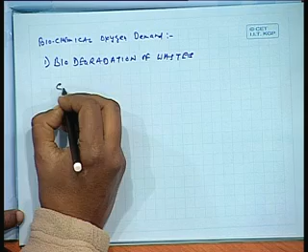Okay. A waste is mostly what you would find as CaHbOcNd, with phosphorus and chlorine. This is a typical waste. This can be any waste or any organic compound, but it is not necessarily a biochemical waste; it is the typical waste.

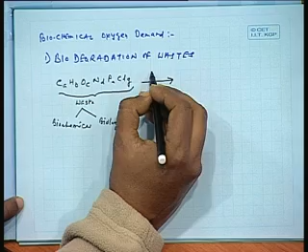A part of this waste can be of biochemical origin, another of biological origin, right, biochemical and biological origin. So this is what the waste would generally be made of. When it is converted by biodegradation, it can be in the presence of microorganisms and oxygen,

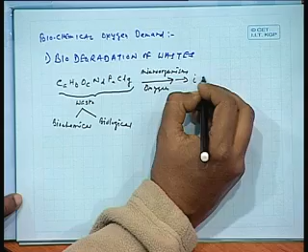it would form CO2, H2O, NH4. Remember this is NH4; nitrogen in water would mostly be available as an ammoniacal radical, plus PO4 3-, plus SO4 2-, plus Cl-. So these would mostly be the reactions that we generally observe in cases like this.

Here, this is the decomposition taking place in the presence of the microorganisms. Now, the thing to understand is why these microorganisms do it. In nature, nothing happens without a cause. Nothing takes place as an accident, or just as it is, without a cause.

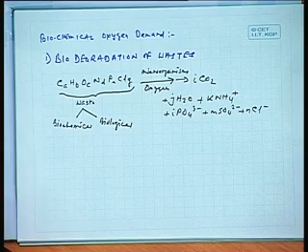Everything has a cause. The microorganisms need them because of two things. First of all, this waste would possibly be in the form of solids, or in the form of liquids dispersed in water. Just like urination is a biochemical waste which is a liquid dispersed in water, or it can be solid waste.

So if it is a solid waste, microorganisms would have to break it down so that it becomes soluble in water, or, even if not soluble, stays in an immiscible liquid state. Immiscible does not mix with water but remains liquid. These two things are very important, because only then can a single microorganismic cell draw it as food by an osmotic method.

Osmosis takes place when there is a change in potential from outside, from positive to negative potential, since there will be a potential difference, so the substance from the external environment would enter the cell.

This is where the microorganisms need to break them down. This remains as the most important reaction, one that can be exemplified as the possible cause for the total human life, total organism life, or total population that we see, basically because this has resulted in wastes getting decomposed. Otherwise, if the microorganisms should not have been there, the waste should not have decomposed at all.

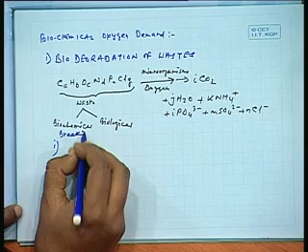This is where the microorganisms play a very important role, and that is how it gets decomposed in two ways. The first process would be known as breaking down into inorganic molecules. We call it mineralization, and the second one we would call biotransformation.

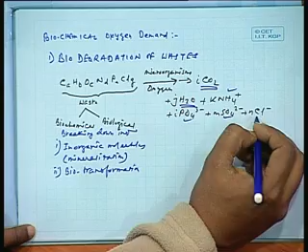Biotransformation: this one is inorganic molecules, mineralization, whereas this one is biotransformation in the form of ions, mostly forming in certain extent in biological materials. So this should be mostly not in the molecular form, it would be in a radical form like this, which would be mostly read like this. So here you can see this would be mostly the biotransformation.

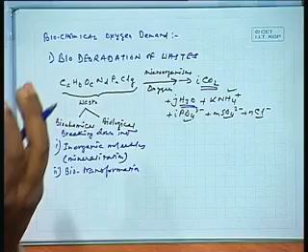So two processes essentially take place, and this happens only because the microorganisms are active, leading these reactions as agents, and they are taking place in the presence of oxygen. So this is one reason why oxygen gets depleted in most of the water body itself.

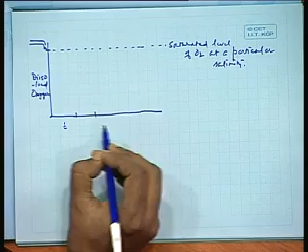What would happen is that this saturated level of oxygen, this dissolved oxygen, if you say it in time, in days - 1 day, 2 days, 3 days, 4 days, 5 days, 6, 7 - it can carry on.

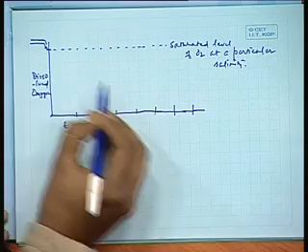So if we just observe this curve now, depending on the nature of the waste, the depletion of oxygen in the water would take place. The rate of depletion of oxygen would depend on the nature of the waste. Remember this, nature of the waste. So you can observe a plot like this.

You can see somewhere it is not going like this, say this is - if you just observe, some of the substances here, mostly you can find this is mostly carbohydrates forming this kind of plot. This is just notional; special kinds of carbohydrates may follow a certainly different curve. This is just for comparison.

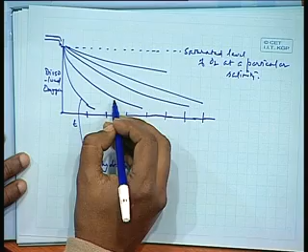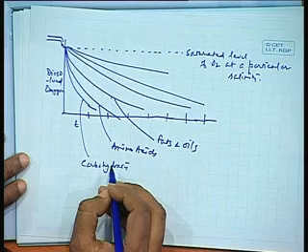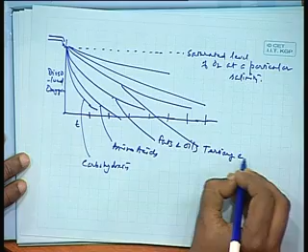Say here, if you look closely, this is amino acids. This one would be fats and oils. So this is tertiary and quaternary - tertiary and quaternary, tertiary carbon and nitrogen compounds.

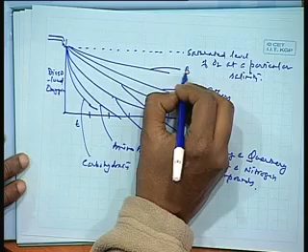Okay, similarly you can see this would be ethers, this might be mostly benzenes. So this is what, generally you will not find in any textbook, but this is what would be mostly the nature of the plots. This is what would be mostly the plot. So this figure is to suggest

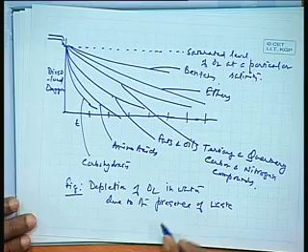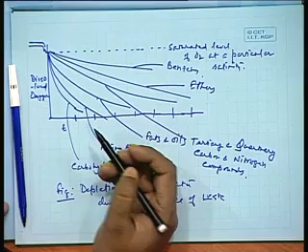that is depletion of oxygen in water due to the presence of waste. We can see this if we just try to observe this now. Here, interestingly, when we are talking about most of this biochemical waste, this would mostly be around this region. This is mostly the biochemical region. These are all the other biological wastes, which should be here. And so mostly you can see this biochemical waste, this would be primary level carbohydrates.

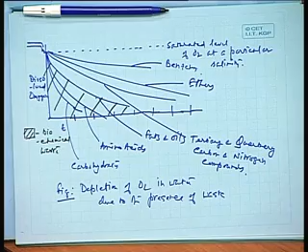Mostly this would be the formation, this one would be showing the biochemical waste. So this is about the biochemical waste, this is about the biological wastes. Biological and biochemical waste, you can see the relationship.

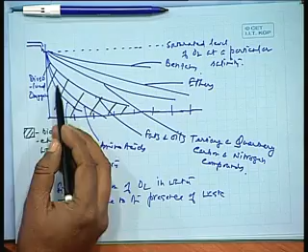Now remember one thing, for most of pollution engineering or wastewater engineering, we generally discuss about this region only, this hashed portion that we generally discuss. The other portions here, this can be explained as the total biological wastes. So this would be biological waste.

Okay, so this is what we generally observe. This is the depletion that takes place. This is how the behavior of different wastes in water occurs.

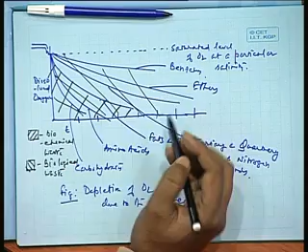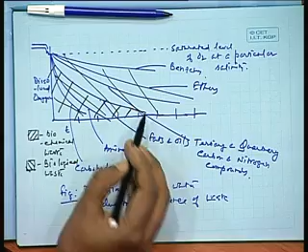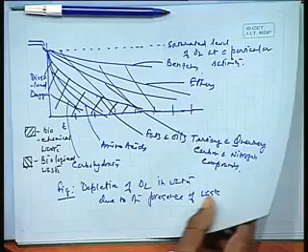What we are observing here is that if there is no further addition of water or no other source of oxygen being supplied to the water, the amount of oxygen in the water would continuously go down till it reaches almost zero. If the concentration of waste is very heavy, the oxygen concentration in the water would go down as much as to zero, so there will be almost no oxygen available in the water. This is one part that is of great significance for our work, for our study here.

We would also see a few things that I want you to understand. This is fats and oils. Fats and oils are less biodegradable than carbohydrates. Okay, this is number one.

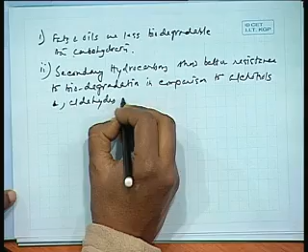Then there is secondary hydrocarbons. Secondary hydrocarbons show better resistance to biodegradation in comparison to alcohols and aldehydes or organic acids, because they are less prone to oxidation.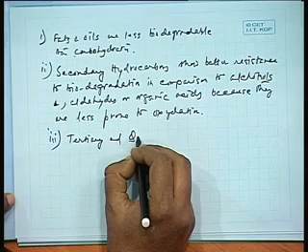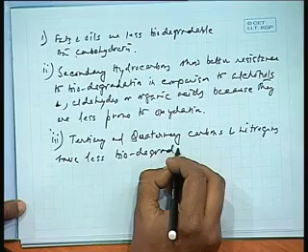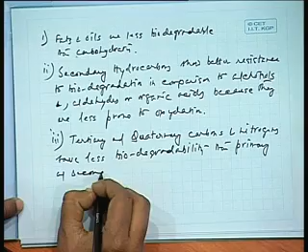Third, if we make this tertiary and quaternary, carbons and nitrogens have less biodegradability than primary and secondary carbons and nitrogens. You can see this, as these are going for higher bonding, it is increasing. Think of organic chemistry, where you start with alkenes, alkynes, then hydrocarbons, carbohydrates, alkanes, alkenes, and then finally you go to the benzene ring, and further into hydrated metal hydrocarbon complexes, all kinds of things. Wherever you go from one stage to another, their biodegradability continuously goes down, becomes less. This is very important for us to understand, and forms a primary basis for environmental control.

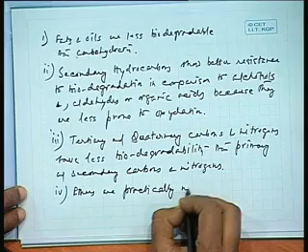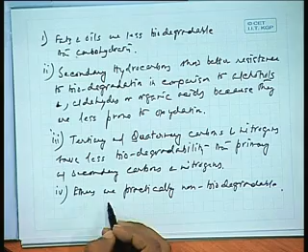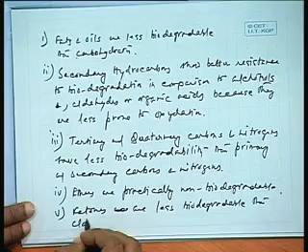Ethers are practically non-biodegradable, so these organisms have almost no effect on ethers. Ketones are less biodegradable than aldehydes.

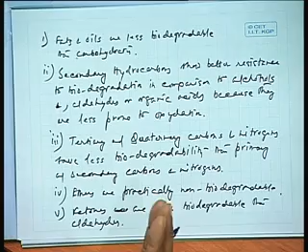Okay, so what I mean to say here, remember one thing, I never said that all these substances can only be of biochemical origin. They can also be outside, and primarily outside, because most of these substances are outside the biochemical range, not produced mostly by biochemical processes. Biochemical substances are mostly related to organic acids, secondary hydrocarbons, primary hydrocarbons, some aldehydes, organic acids, substances like that, but not in the higher organic groups.

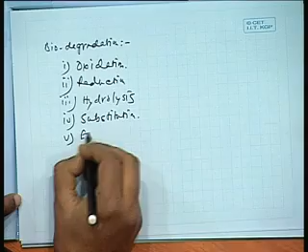Having said all this, there are few processes that actually reduce waste through biodegradation. In this process of biodegradation for most kinds of wastes, one is certainly oxidation. One process that leads to biodegradation is oxidation, reduction, hydrolysis, substitution, elimination.

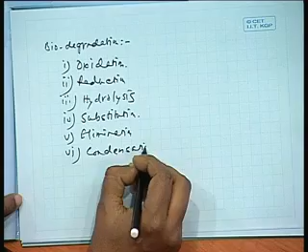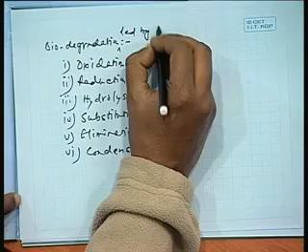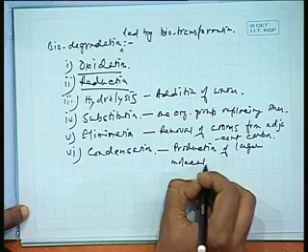These are biotransformations, biodegradation led by biotransformation. So biodegradation led by biotransformation, the transformations that take place can be oxidized, reduced, hydrolyzed with the addition of water, substitution where one organic group replaces another, elimination which is removal of atoms from adjacent carbon, and condensation, where you see the production of a larger molecule, along with release of electrons, as you know, oxidation and addition of electrons.

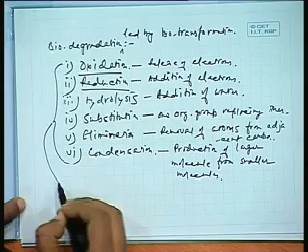In all these cases, a number of several microorganisms can be an agent. Microorganisms as agents not only does decomposition of wastes, they can decompose, they can transform also. But the most important thing, more than biodecomposition, is biotransformation. This term is more appropriate, because it is not necessarily always oxidation that takes place.

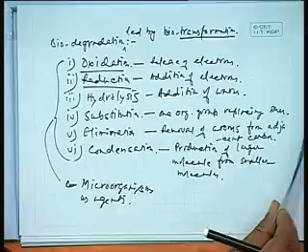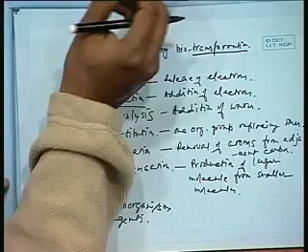Having said all this, these are the most important things when talking about oxygen demand, particularly biochemical oxygen demand. Remember, biological oxygen demand is biochemical oxygen demand plus non-biochemical oxygen demand, say from waste or living organisms. So we can observe that biological oxygen demand would include this.

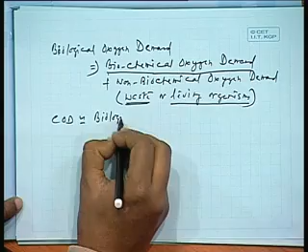So biochemical oxygen demand plus non-biochemical oxygen demand from waste, out of the sources of biochemical origin, and also some living organisms, plants and plant species and animal species, or any kind of species you can think of. This is the total biological oxygen demand. In fact, when we are finding COD, mostly COD is almost similar to this biological oxygen demand. COD is essentially biological oxygen demand, right.

Once we make this distinction, you can see there is an essential distinction we have made: most substances of biochemical origin and also of biological origin can be easily decomposed into other hydrocarbons. The most convenient way of saying this is that biochemical waste plus oxygen, in the presence of microorganisms.

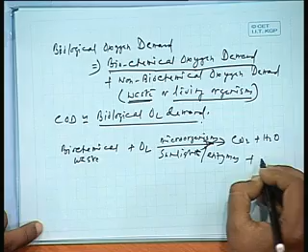The microorganisms also sometimes need a source of energy. Source of energy is also very important, so sunlight, or any other substances, sunlight or enzymes, different enzymes that we can generally find out, decompose into CO2 plus H2O plus new cells plus stable products.

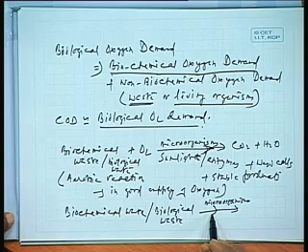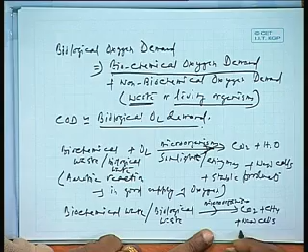It gets immediately converted in the presence of microorganisms remaining there, but generally the microorganisms also change. These are aerobic microorganisms, but they would become mostly anaerobic microorganisms, right? Aerobic and anaerobic microorganisms. Mostly in all these cases we find CH4 plus new cells plus unstable products.

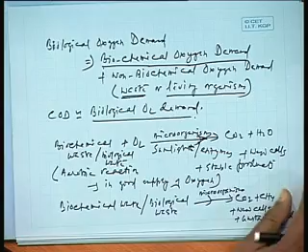You can see how best we can explain this situation: when the waste is immediately dropped and the oxygen is not yet depleted at this point of time, we find that the aerobic reactions are taking place. As the oxygen level decreases, other sources of energy such as sunlight also decrease, or we are not allowing other energy sources to go in.

This is generally in the depth of water. If you consider the depth of water, at the top column of a pond, mostly the reactions we observe would be aerobic reactions. But as we go deeper, where there is less sunlight and the water is depleted of oxygen, we find the second state: biochemical or biological waste getting depleted by anaerobic microorganisms, in the absence of oxygen and sunlight, to form carbon dioxide, methane, new cells and unstable products. This is how mostly these organic substances get decomposed in water.

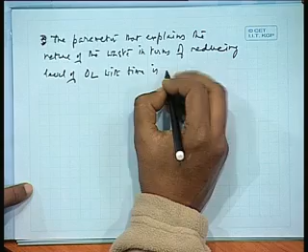Now, having said this, there is a very standard thing we generally find: the 5-day BOD test. The parameter that explains the nature of waste in terms of reducing level of oxygen with time is known as BOD, biochemical oxygen demand. What is the demand of oxygen by the waste?

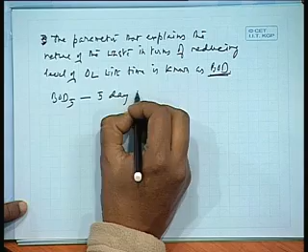One very conventional way of using this is BOD 5. This is called 5-day BOD, BOD 5 or 5-day BOD. Why BOD 5? Let me explain this here itself. If you just observe a particular waste, if it is a biochemical waste, mostly a typical biochemical waste. Remember this is a typical biochemical waste. Okay. This is biochemical waste.

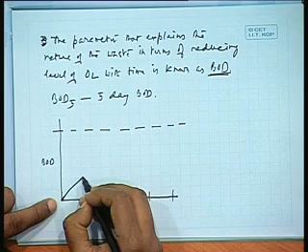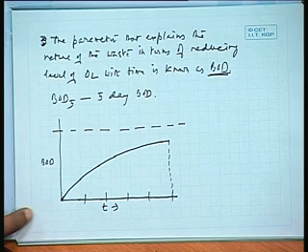So, you can see this biochemical oxygen demand in relation to time. If you just observe, first for say 5 days, 1, 2, 3, 4, 5, this is the BOD. Before the waste is dropped into the water, the water does not have any oxygen demand. As soon as the waste is dropped into it, the oxygen demand is rising, but at an increasingly flatter rate. The rate would go down, but the demand of oxygen would still be higher. So the demand of oxygen would be like this.

So, in such cases it is observed generally at 20 degrees centigrade, without other sources of oxygen, thereby making sure that there are no other sources of oxygen supplied or given to the water. In such cases, this is how the BOD, the biochemical oxygen demand, would increase.

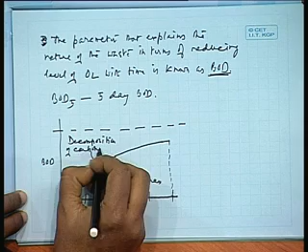And then what happens in these first 5 days, this zone, is basically the decomposition of carbohydrates, like any kind of waste. Say if it's a dead body thrown into water, or rotting in the water, for the first 5 days we observe that the requirement of oxygen is just to oxidize these hydrocarbons, these carbohydrates.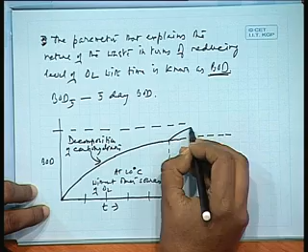What we observe is, after 5 days at 20 degrees centigrade, the demand of these carbohydrates, or what we call carbonaceous products, would remain almost constant, but here we find that there is another demand increasing at this point of time. This demand can continue for a long time.

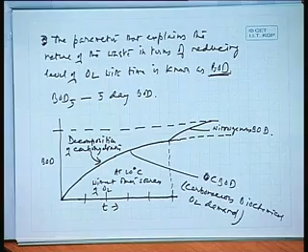This is called nitrogenous substances. So, nitrogenous oxygen demand; this part is nitrogenous biochemical oxygen demand, NBOD. This one is known as CBOD, carbonaceous biochemical oxygen demand. So, what we find out in BOD5 essentially is carbonaceous biochemical oxygen demand.

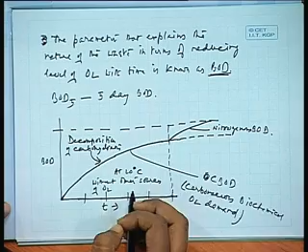This oxygen demand would take place till what time? Till the time the oxygen is completely depleted out of water. After that, decomposition would go down very slowly, unless there is a source of oxygen. Till that point of time, the decomposition would not take place.

Okay, I think we will stop at this point, right? 1 minute. We will stop at this point. I have asked for 2 classes in fact. So, if we are given a class, we will take the same class, otherwise we will just be off here.

So we were discussing this BOD, the biochemical oxygen demand, as we said in the beginning. So, there is one important thing, the determination of BOD. The standard, let me do it step by step. Number 1, collect some 30 to 50 milliliters of wastewater sample in a stoppered bottle.

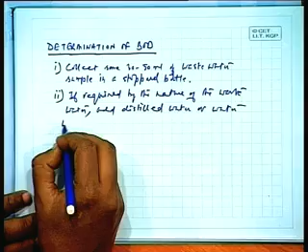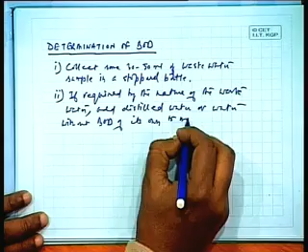If required by the nature of the wastewater, add distilled water, or water without BOD of its own, to make the solution up to 400 ml.

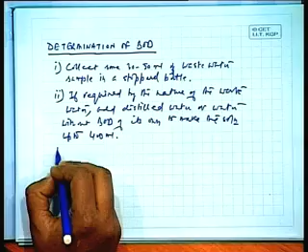Determine the dissolved oxygen. Otherwise, if the BOD level is very low in a sample wastewater, suppose you have a water which is having a very low BOD of its own. In such cases you might find at the end of the 5th day there is no depletion of oxygen, because the reaction rate is so slow that no observable change has taken place.

So, for a seeded BOD, if you just use some water having its own BOD, then in that case we find out that the reaction takes place at a faster rate, the depletion of oxygen is at a faster rate, and we find a considerable decrease in the level of oxygen in the water. So, this is why this is called seeded.

The water having BOD of its own is known as seed, and the method is known as seeded BOD test. The experiment, the method, is known as seeded BOD test.

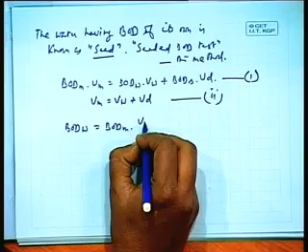Right. We can also find out that Vm is equal to Vw plus Vd. So, from equations one and two, the BOD of the waste can be written as BOD of the mixture times Vm divided by Vw, minus BOD of the seed.

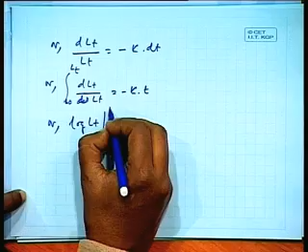As an integration, it would go from L0 to LT, and the other side is minus KT. So, here it is log of LT over L0 equals minus KT, or we can find out that LT is equal to L0 into e to the power minus KT.

So it comes log LT divided by L0. LT by L0 would be e to the power minus KT. So, bringing L0 there, LT equals L0 into e to the power minus KT. Here L0 is known as the ultimate carbonaceous BOD. Remember this, ultimate carbonaceous BOD.

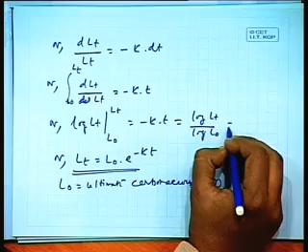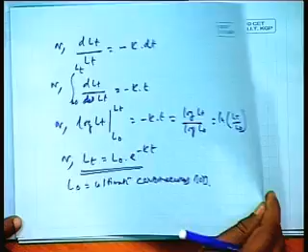This is known as ultimate carbonaceous BOD, which you can see from log LT divided by L0, or as e to the power. So, here this one is the ultimate carbonaceous biochemical oxygen demand. So, in case we are plotting it now, try to see this.

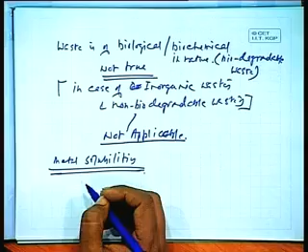These metal solubilities deal with solubility under a partial pressure condition in water, how one metallic ion gets released in preference to another metallic ion. And in many cases the speciations become different. Let me give you a simple example here, where we could observe these metal solubilities.

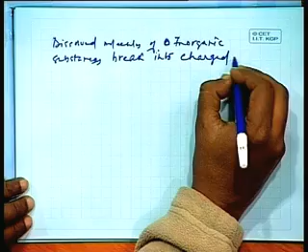Mostly dissolved molecules of inorganic substances break into charged ions. These charged ions, you can see, one example is cadmium. It is quite interesting to observe that cadmium in the presence of chloride ion can form, in a reversible reaction, CdCl plus.

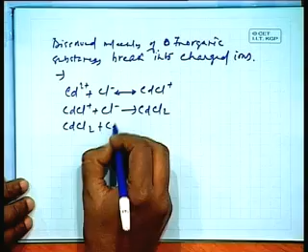This CdCl plus with Cl minus can form CdCl2, plus Cl minus can form CdCl3 minus, and this CdCl3 minus can react further with Cl minus.